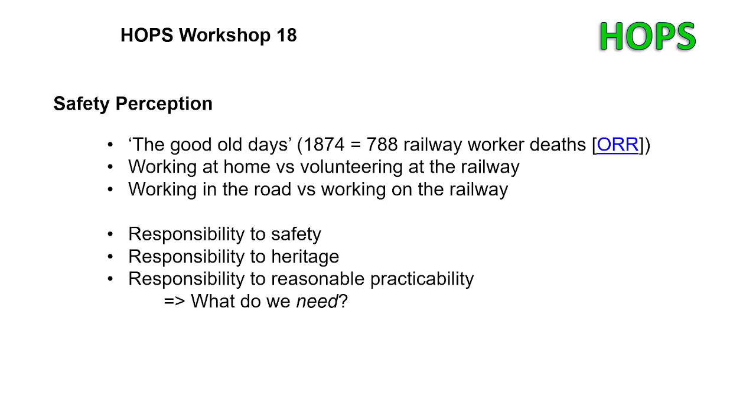We as Heritage Railways operate for limited hours during the day and limited days of the year. So work that it is necessary to go on the line for could potentially be done on days when we're not running trains or during hours when we're not running trains. Again, this is all to be tempered with what's appropriate for your local organisation. Some Heritage Railways run every single day of the year from February to October and then every day in December. And clearly it's a bit more difficult for you to find a day where you can go in and do work when no trains are running.

Some Heritage Railways only run certain days of the week or always don't run on certain days of the week, and they're the days to be aiming for, to be getting out and doing the work on the track. Because if we can do it on a day when there's no train running, then we should do it on a day when there's no train running. So you can see there are quite a few opportunities here for us to reduce risk to trackside staff. The other thing is about the balance of risk.

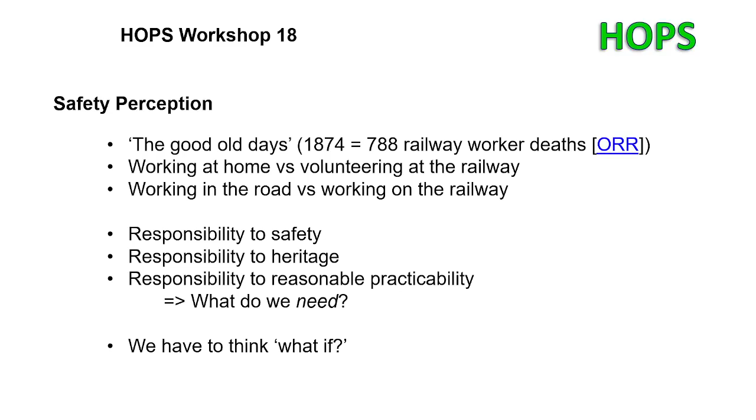If you applied this risk assessment, which is the start of what we're doing now, to a mainline railway, you'd say it's not reasonably practicable to have days where we don't run trains or hours where we don't run trains because we're an essential public service. There's alternative risks to not running trains. People die on the roads, for example. But Heritage Railways are, in most cases, not an essential public service, which makes it more difficult to justify why margins can't be found for people to do work on track when there are no trains running.

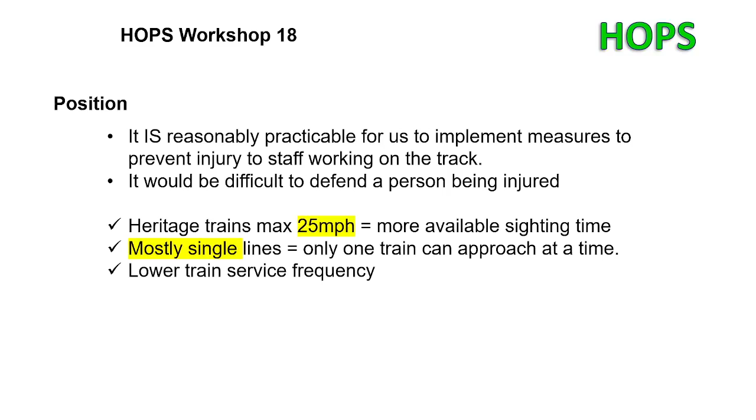And unfortunately, that is a classic safety scenario on Heritage Railways, that somewhere some guard gets dropped for a little while, there's an incident, then suddenly everything becomes very strong in that safety area, either just on that railway or on all railways, and then next year something else dips a little bit, and it just goes on and on like that.

The key thing in terms of the current position for me is that we must always be able to justify how a person is protected. Those ticks are all things that we can use to minimise or to justify the minimisation of the risks we're exposing people to, but we should always be prepared to justify how a person was protected. The what-if scenario: what if that person got injured? What would I say when I'm asked, how were you protecting that person? What measures were in place to minimise the risk to that person? And if the answer to that is nothing at all, we rely on common sense, then that's not going to last very long, I'm afraid.

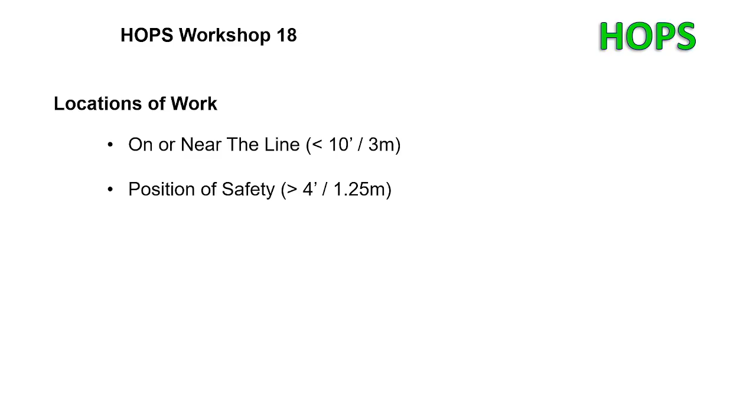But if I'm working on the line side, then that's absolutely fine. I can do that. I can trim the grass. That's no problem. I don't need any protection from passing trains. I just need my PTS training to make sure that I understand that on the line side is where I must stay. I do realise that this is a simplification, let's say, from what is on the main line, and this is deliberate, where we've narrowed it down into what we found the best practices are from the railways that we work with.

And just in case you weren't aware, there's Alan from the HOPS office, 1.25 metres or 4 feet away from the track, standing in his position of safety with his high-vis not done up. Tut tut.

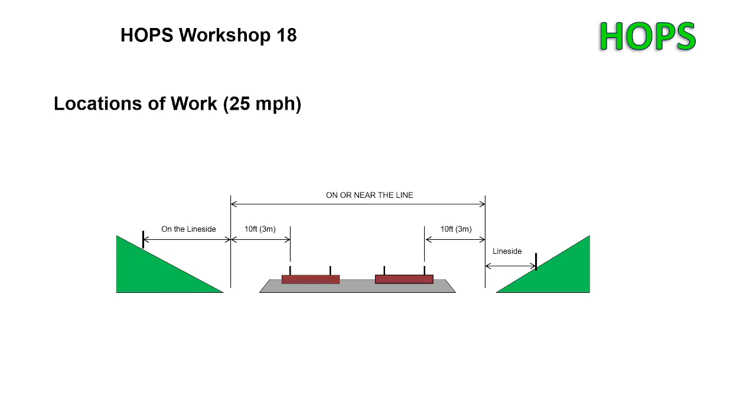Right, so having established where we will need protection, let's now look at the methods of protection. And I should say, sorry, I meant to say before we moved on to this slide, that this protection, this general word I'm using, this formal method of making sure that a person isn't injured by a train, applies to every railway. It doesn't matter whether you're a 20-mile long railway or whether you're just a railway round a field, and it doesn't matter whether you're a standard gauge railway or a narrow gauge railway.

To a certain extent, it even applies to the miniature gauge railways, because even getting hit by a miniature gauge overscale 7¼ inch train could hurt quite a lot. Again, you'll have to tweak the principles so that they match your particular undertaking, but please don't fall into the trap. Here's the nub of this: don't fall into the trap of thinking, well, our line is only 500 yards long, or our line is only 15-inch gauge, or any of those things, therefore we don't really need all this.

Because remember those analogies, working in the road, cleaning leaves out the gutter of your house, they're all ways in which you can get injured if you apply that sort of "I'm at home, I'm taking responsibility for my own risk" outlook, rather than "I'm an employee, I need to be responsible for my own safety and safeguarding that of my employer here." Okay, sorry, meant to say that on the last slide.

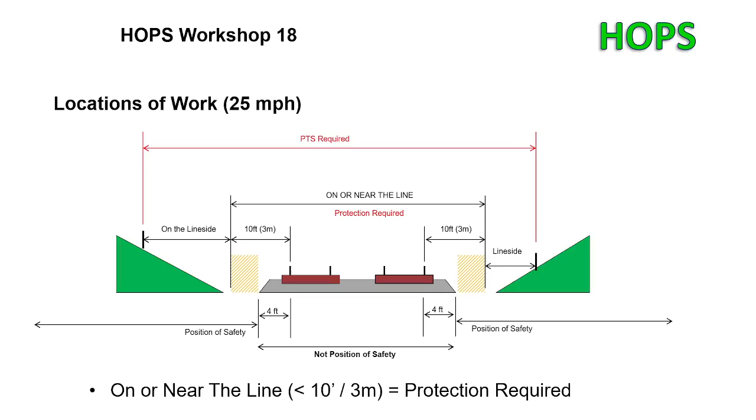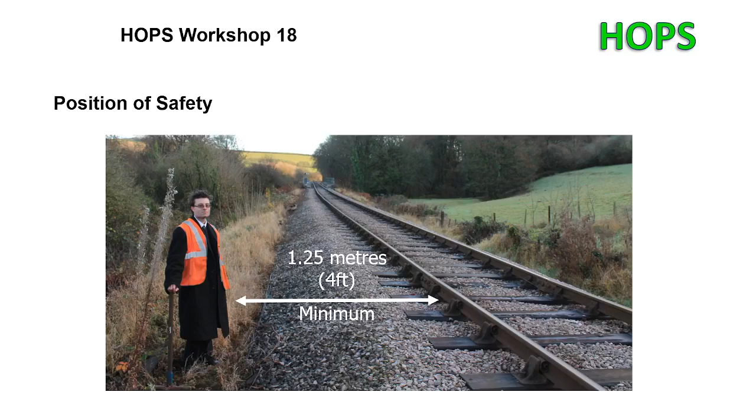I always say, if it's going to affect the integrity of the straight running rails on which a train can run over the top without hitting anything significant enough that it's going to derail, then you're probably not affecting the safety of the line. Yes, there's all sorts of edge cases. You could say if you're working on a set of points and you wind the motor over so the points are half and half, then the train will derail, but we don't consider that we're affecting the safety of the line every time the signalman swings the points from side to side.

My next question is, am I using trolleys only, or have I got trains and plant that I'm going to be using? Because again, this is going to go two ways and it's going to make a difference where we end up. So first of all, if I've got trains in my work that need protecting, then the protection method we're going to call a possession. That's the word that survived through the centuries, possession. It's the most risky activity, and therefore it calls for the most robust method of protection, and we'll have a look at the form that takes in a minute.

But if I've only got trolleys, which are much less likely to derail a train, and if they do, it's much less likely to be as serious as if a train ploughs into a tamping machine or a ballast train or something like that, then we'll come one down. And this on the main line is called a line blockage with additional protection. It used to be called a T2, and it's the method of protection that's appropriate if we are affecting the safety of the line, but not to the extent of actually using trains in our job.

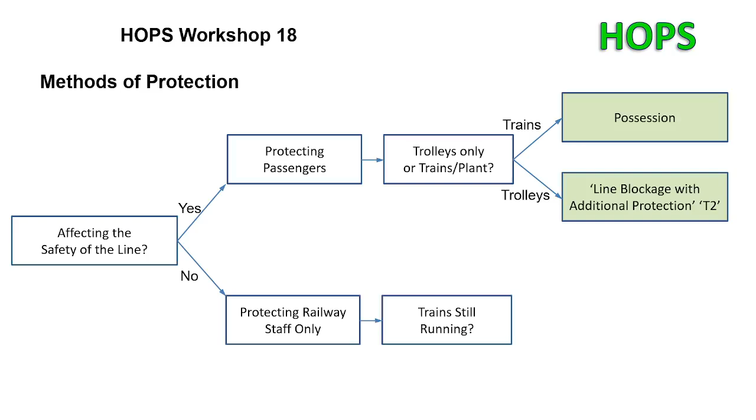Clearly, if we had a Heritage Railway and both of those things are taking place at the same time, we've got to make sure we keep them separate, but there is some potential to relax here a little bit if the only thing that's going on the line is the work, and it can robustly be assured that passenger trains will not start running while it's going on.

Right, let's move on to the next slide and we'll talk about those four methods of protection in order. So starting with the best one, possession. Remember, this is the one for the protection of railway persons and trains or passengers. It's for work that affects the safety of the line, for use with trains and plant in the work. There is a big collision risk here between trains running around with the passengers in and trains that are taking place in the work.

And there's also a runaway risk that we have to consider, such as if a road rail machine rolls away within the possession. Now, it's not always possible to mitigate every single risk, of course, but we have to do our best to minimize these as far as possible. So we'll try and provide some sort of protection both for the work and the staff in the possession, and for the trains on the open railway outside.

So for these types of things, as well as protection by signals, as well as having to have a mechanism for guaranteeing that signals are at danger, which could be verbal agreement with the signalman, we need some additional means. And following on my generalisation that most heritage railways are single lines, most of those single lines are worked by either electric token block or train staff and/or ticket. And so the person in charge of the work taking custody of a token or the staff is a fairly decent means of protecting a possession.

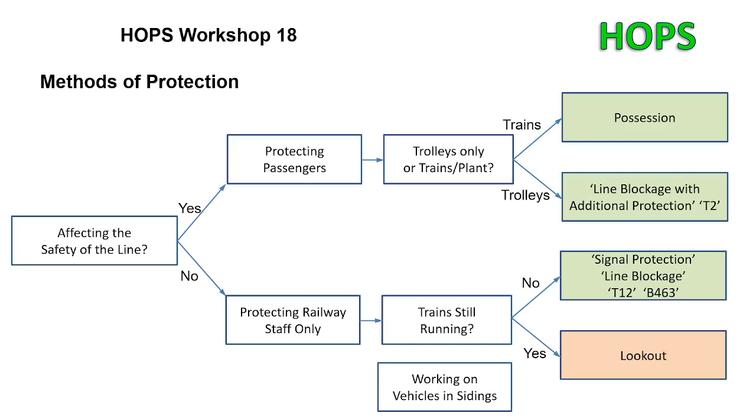On predominantly single line railways where it is not necessary to protect the adjacent line in an emergency, the justification for carrying detonators around in guards' bags and on locomotives and clipped to the block shelf in signal boxes and things like that rapidly diminishes. Think of the what if scenario. What if somebody got injured by one of them? And I imagine that you'd come to the conclusion that you'd find it difficult to justify why they had them in the first place, and why they weren't in the proper container, and all those sorts of things.

Now, I know that some railways have double track, some railways work on the main line, so you have to carry detonators anyway. That's all fine. I just thought I'd put it in there to provoke the discussion, because detonators have in the past been used to protect possessions. I don't think detonators are an appropriate method of protection on a heritage railway for protecting possessions where other equally robust protection measures are available that don't have all those risks associated with putting detonators out.

And finally, a human interlocking is not acceptable for this type of protection of work, this possession. We can't just rely on the signalman to keep a reminder collar on a lever, for example, whereas with other methods of protection we can, because here we're protecting the trains and passengers, and because of the seriousness of the work that's going on in the possession, involving ballast trains or tamping machines or things like that. We need something better than just a human protecting the work, such as the token, for example.

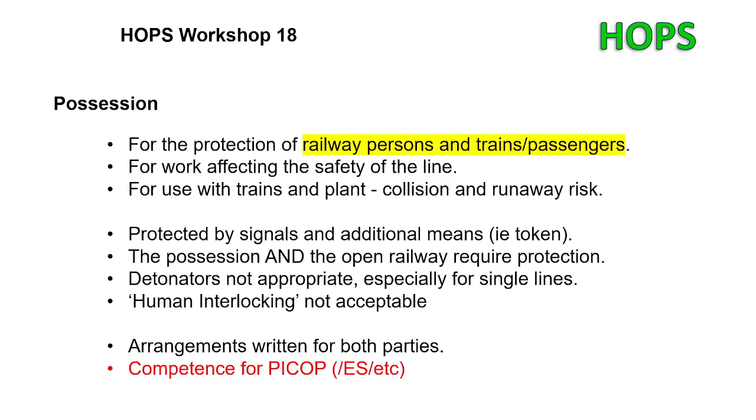Now let's have a look at methods of protection for work that does not affect the safety of the line. So first of all, if trains are going to continue to run, we've got this good old signal protection. This is just the human interlocking, nothing else at all. This is for the protection of railway persons only, persons working on the track. It's for work not affecting the safety of the line, and that's because we're going to be relying on just signals, just the signalman remembering not to pull that lever or remembering to keep that reminder appliance on.

A mistake could potentially be made and a train could come into the area that's being signal protected. As we say, it's not nice to suggest that we just run the railway staff over without caring, and that's certainly not the case, but railway staff are a bit more ready to jump out of the way than a ballast train or a tamping machine is. So signal protection is protected by signals and the signalman and driver discipline, such as keeping that reminder appliance in place, and the driver obeying the red signal and stopping at it.

Again, written arrangements for both parties, and the arrangements are pretty similar: who the person is, and if they've got a mobile phone, that's probably a good idea, and an exact understanding of which section of line between points and signals is going to be blocked, so everybody knows exactly where they are. I would not suggest for a moment that a verbal agreement is good enough, apart from in an emergency, of course, and I'm sure we all know that in an emergency, we do the most appropriate thing.

If a person has fallen off a platform and injured themselves and is lying on the track, clearly a telephone call to the signalman to block the line, starting with the words, "This is an emergency call," and explaining the circumstances, reaching that clear understanding verbally is completely appropriate in that circumstance. Whereas jumping down to repair a fish plate bolt or whatever, which is not urgent and not an emergency, there is time to dig into your bag and find your signal protection arrangements form, or whatever you want to call it, so that you can confirm that both sides have reached an understanding.

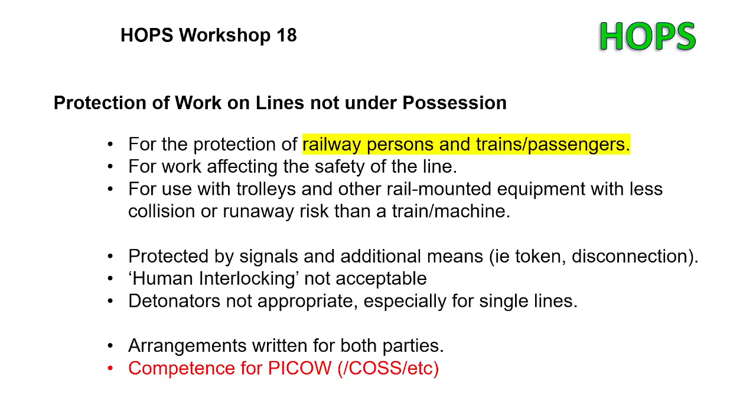If that takes longer than it would have done to do it verbally, that's because when you were doing it verbally, you weren't reaching that clear understanding. And I know that's possibly not 100% true, because I can probably talk faster than I can write, but I would far rather have staff that, instead of spending 30 seconds explaining it to the signalman verbally, spend a minute writing it out and explaining it to the signalman verbally, for the massive increase in likelihood that they're going to reach a clear understanding that brings.

Right, and the fourth and final of the main part of the flowchart options is lookout. And if you remember, this one was coloured red. This is the one that's the worst of all, but sometimes is unavoidable, where trains are going to continue to run whilst the staff work on the line. And remember how I worded it: the staff are on the line, the train is coming, come what may, and it's just up to the staff to move out of the way before it gets there.

Where on earth else in the railway do we give the train authority to move and then just rely on the fact that we'll make it safe before the train gets there? Almost nowhere else. Is there? AHB crossings, maybe. But on the railway, we're all obsessed with safety, quite rightly, and we say we'll make it safe and then we'll do the thing. We'll close the doors and then we'll dispatch the train. We'll set the points and put the FPLs in and then we'll clear the signal.

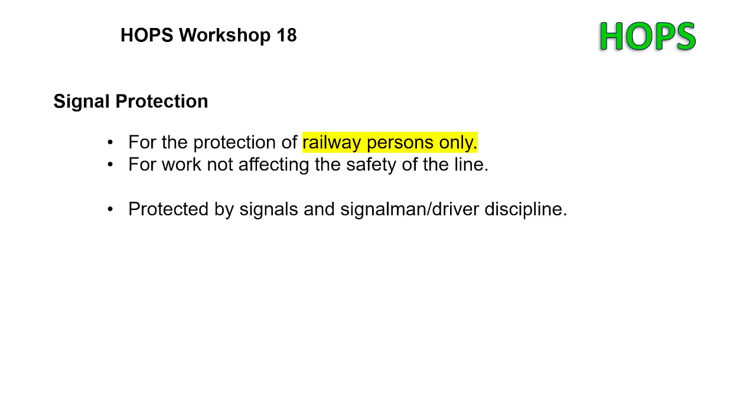We don't ever say we'll dispatch the train and then we'll run along and slam all the doors and we'll hope that we manage to do it before it pulls away. We would never dream of doing that. But here we are, allowing people to go out onto the line. Then we'll send the train and see how many of them it can knock over like skittles, or if they manage to jump out of the way before it arrives.

And the only reason that we have to accept that and that we have to do it is because there's no other reasonably practicable option for some work, is there? We can't do all work when there's no trains running. We have to do some work when there are trains running. And that's why this method of protection requires the most in the way of mitigation and absolute robust procedures, because it is the one where we're exposing ourselves to the most risk.

For the protection of railway persons only, which means you know what the next bullet point is going to be: it's for work that does not affect the safety of the line. And there's not a huge amount of heavy work that can be done with lookouts, because obviously you've got to be able to stop it and move it out of the way in time when a train comes into view. It is, as I've said many times now, the members of staff's responsibility to move out of the way. That is the size of it.

There are some prerequisites here then, of course. We've got to have sufficient time here. I know that time comes from the distance of visibility, but we've got to be able to give these staff sufficient time to move out of the way between them becoming aware of the fact that a train is coming and the train actually arriving where they would otherwise be in a position of danger.

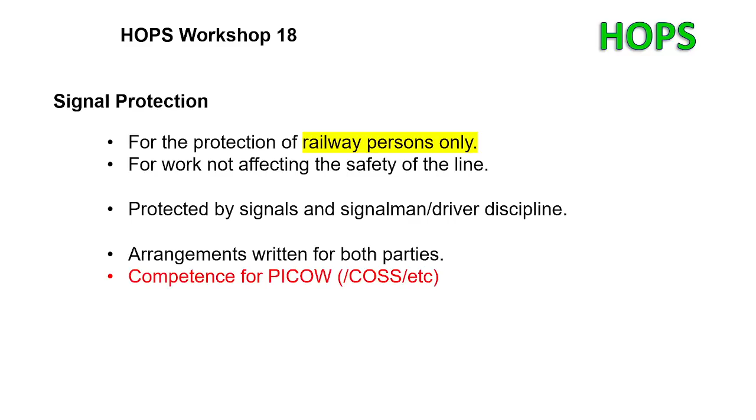But also, if you put yourself in the position of the driver and you see a gang on the line a mile ahead and you know it takes you 400 yards to stop, at what point do you start braking? Do you start braking a mile away, half a mile away, 400 yards away, 300 yards away? Because our trains run slower than mainline trains, there's a lot more seconds in 400 yards for a heritage railway train than there is on a mainline train. So it makes it very difficult for us to prescribe to a driver when you should start to brake if you see a gang working on the line ahead.

And inevitably, the human brain would leave it too late. So we're not going to give any relaxation of the risk here to the fact that the trains run more slowly, and therefore, in many cases, probably could stop before they reach the gang, but you can't guarantee it.

Oh, I'm seeing video lost. This isn't good. Let's see whether you're still here.

Oh, you're back. Right. Sorry, I don't know if I went away for a moment there. As always, my video is not 100%. Okay, I'm sure you'll soon let me know if you can't hear me one way or another, but I'm going to carry on.

Right, so where are we? Here we are. Right, this is a human method of interlocking. I haven't put it on the board there because actually there is no interlocking in terms of signal levers or reminder appliances or anything like that. But this is an example of human interlocking. I shall do these last two bullet points in the wrong order.

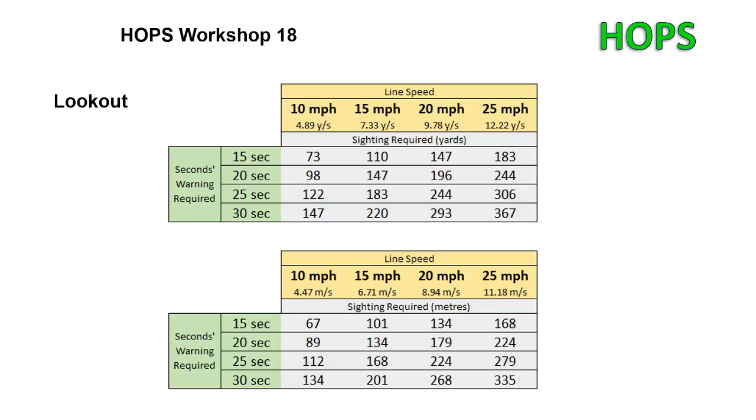In some railways, I've seen that this also applies to platform lines, such as out of hours, so that when there is no signalman or when the railway is not operating, the carriage and wagon staff can come along and do the exams on the carriages parked in the platform lines without having to book a signalman on just to provide the signal protection and then go home again, which clearly is not going to be very practicable on a heritage railway. Arrangements like this should obviously be locally specified. If they're not in the rulebook completely, then they should be in the local instructions.

Right, excellent. And of course, my favourite word, competence: for people who are going to be applying this method of protection, there must be a competence for them. All these competencies don't have to be 500 pages long, by the way. The competence for working on vehicles in sidings can be really simple. It's that the person understands when to put a not to be moved board on, when to put a tag on, when to take it off, when to clip up points, when to put a stop board on. They're the sort of things. If the siding is controlled by a signalman, that they have to ring up the signalman and ask permission first.

It's not going to be more than 8 or so points on the assessment criteria sheet to be competent to work on vehicles in sidings, and not a huge amount more than that for the other things that we've talked about, like PICOW and lookout and those sorts of things, but we've got to have something.

Right, last few little things then. Work arrangements. There's 2 options here. You're either working on your own or you're working in a gang. If you're working in a gang, somebody must be in charge of it. So good old competence: there must be a competence for the PICOW. As we've already established, it could also be called a ganger. Same thing, really. And if you're working alone, then there should really be a competence for working alone to make sure that you understand the parts of the PICOW's job that still apply to you while you're working alone.

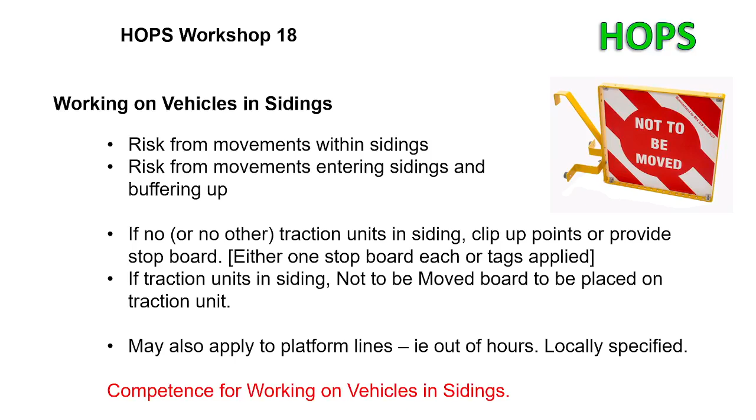Right, well, it's the last resort, isn't it? High visibility clothing is the last resort for if all of those other methods of protection fail, the driver sees the high visibility clothing, blows the whistle, the staff working on the line hear the whistle, which again, no method of protection so far that we've discussed has relied on people hearing anything, and then they move out of the way. So it's the last resort only. It's if everything else fails that the high visibility clothing is necessary.

It's if all those other systems that we've put in place have for some reason allowed a train to slip through the net, the high visibility clothing will allow the driver to see us, blow the horn, we'll hear them and we'll move out the way. That's like a 3-step back and forth process in order to achieve safety there, and that's why it's the last resort.

There are two other reasons why I always say we wear high visibility clothing on heritage railways. One is it clearly identifies who is legitimately on the track and who isn't. I'm sure somebody, if they wanted to, could put on a high vis and go for a walk, but it's very clear to see if somebody is not wearing a high vis, they're not on the line. And if somebody who either accidentally or deliberately claims they don't understand whether they're allowed on the line or not sees somebody else walking on the line and they've got high vis clothing on, it's very easy to discern that that person is intending to be there, whereas somebody walking around without high vis clothing on is much more likely to induce other people to do the same.

And the third reason for high visibility clothing is a discipline reason, for the same reason that armies wear uniforms and school children wear uniforms. If you dress a member of staff up in high visibility clothing with a railway logo on it, it's clear they're a member of staff and they feel like they're a member of staff and they recognise that they're part of this team that's all wearing the same clothing, they are much, much more likely to behave in the way that we want them to behave, in a safety-conscious way, than if everyone just turns up in whatever clothing they like and some people don't wear a shirt at all. That breeds a much more sort of I'm doing whatever I like type approach.

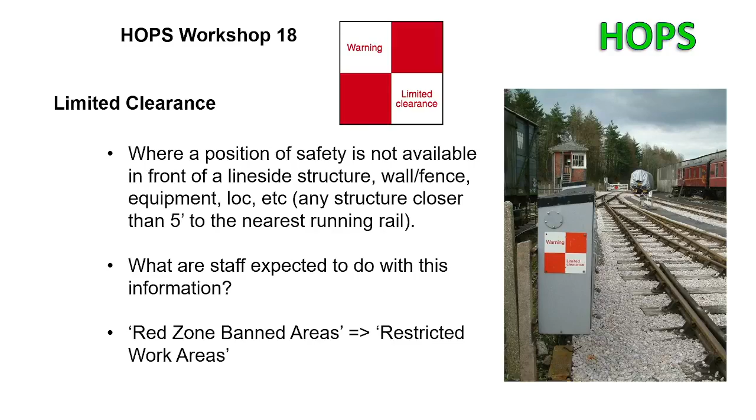And consider risks arising from the tunnel lighting. If you provided lighting in tunnels, that may well be very good for the track staff, but first of all, what are you going to do if it fails? And second of all, what impact does that have on the visibility of the train crews going through the tunnels? So I don't think there are very many tunnels on heritage railways that have tunnel lighting, but certainly it's something that has to be considered very carefully.